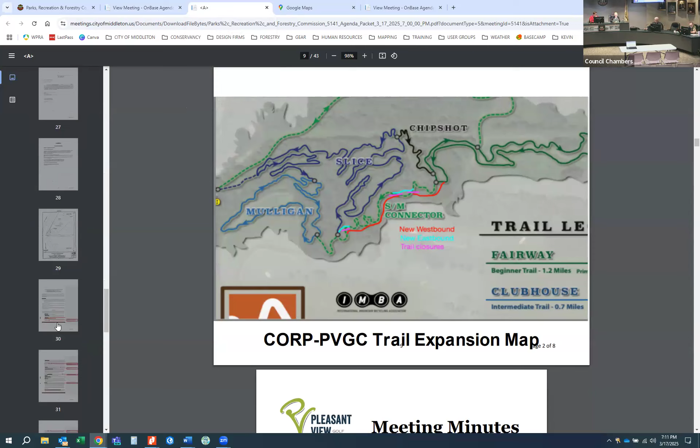I certainly didn't envision that we would be mowing the whole area. We wouldn't have to, even if it grows up. I would think the snow removal would be the bigger deal.

Removing litter from the paved area and nearby adjacent grassed areas, mowing grass areas, keeping any landscaping healthy and in neat condition. It's highlighted there under number 5.

I can't imagine that they would require us to mow anything other than adjacent to the path. That, from a safety standpoint, should be mowed by the DOT or by the county, whoever does it. I don't know what it would take for us to mow a mower's width on either side of the path, and I guess that might make sense.

But much more than that seems like something we don't really want to get involved in. I agree. The comment here includes a width, defining what we would need to mow in that area.

Any other questions or concerns? I just want to represent Kylie's concern. She has impressed this upon me ever since she arrived that, with this project, we are adding mileage to the trail system without adding staff.

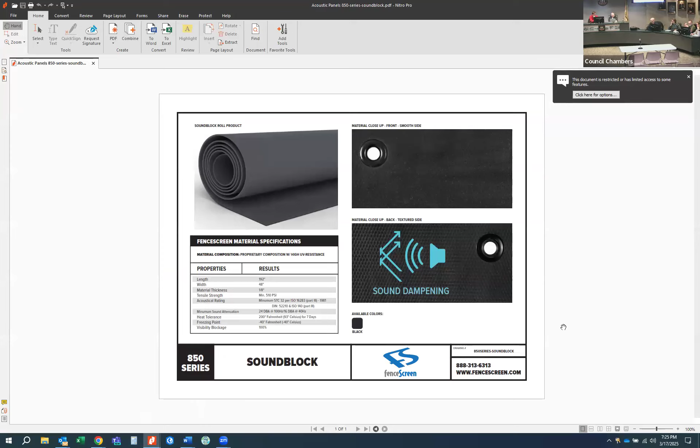This is a different application. Is that a concern here? Do you need to overlap this, and is that provided for?

Let me just, I have the website open here. Yeah, I went to the website.

Yes, so that it is tied together as they roll those panels out, it'll be zip tied to the fence. And then it will have overlapping so that there will not be gaps. Okay.

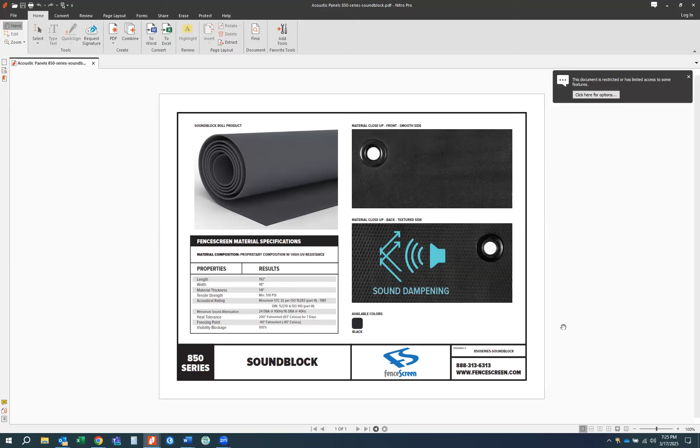And this has been used before and it's been proven to be effective? Correct. This whole pickleball noise thing is newer, as pickleball continues to rise. But obviously we have now installed any of these panels ourselves on projects that we've been involved with. We haven't been involved in any projects that have had them, but most recently over the last few years, there's just about every project that gets brought up.

So we had talked to Kylie about it. We know that pickleball noise is a real thing. It is loud, and this will provide some assistance in helping mitigate that noise. There's still going to be noise, but we're doing what we can to help mitigate it. No, you can't shut it down completely, but you have that many more players than you'd have with tennis, so I understand.

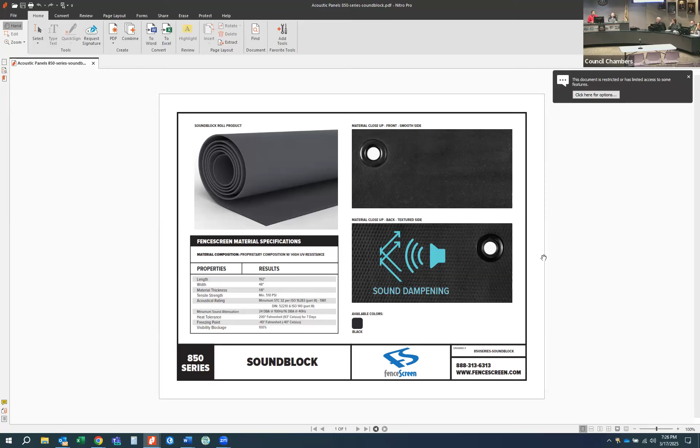Can you remind me the configuration along Mendota? Are those tennis courts or pickleball courts? Tennis courts. Okay, because that's what's going to be closest to the neighborhood.

Yeah, I love tennis, I love pickleball. I think the privacy slats seem like a good idea to me, because every time I go to a tennis court or pickleball court, the tarps are just flying in the wind and aren't really secured. So I would request that we table the sound dampening material, or earmark it for potential future use, but maybe not start with it. I think we also have to find out what the city's sound ordinances are for annoyances and things like that.

Are we doing this because we know it's going to be a problem, but we're spending $11,000 that maybe we need, or maybe we don't need at the current time, especially since we had to approve an increase. So I would just request that. Those are my thoughts, and I don't know what the city's noise ordinances are.

Can I ask the consultant, is that sound dampening material easy to add as an afterthought? Yes, this is something that could be added after the fact.

Actually, if I share my screen here, I have the layout up. Let me see if I can share what I'm looking at, with that layout of the 2 tennis courts adjacent to Mendota and then the 6 pickleball courts north of that. Can you see my screen yet?

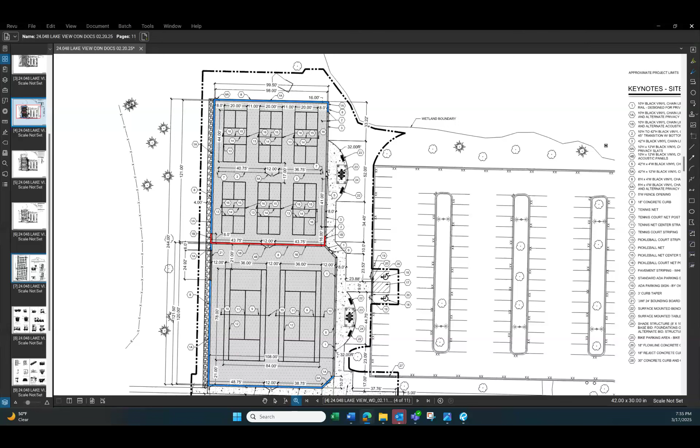That work for you, Ryan? All right, I'm trying again. Is it back up yet? We can see your screen, Ryan.

So yes, the tennis backboard, obviously, if there's a desire for a backboard, whether that's for community practice, anyone can utilize that at any time. That is on the west fence line here. That is something that is used for practice. And yes, obviously, if there's someone utilizing that court, that backboard is not available for use. And that's something that will always conflict.

So as we do a lot of high school projects, a lot of school projects that we're doing now do not include backboards. It's kind of a personal preference. Some community parks like this see more of a need for it just for general purpose use. It's really a mixed bag, some people really like them, some people say they don't get used much. And as we went through it with Kylie, she thought that there's a strong desire for it. So that's why it is included in the project. But yes, you're right that it would conflict with court usage. And that's how they are incorporated into any facility.

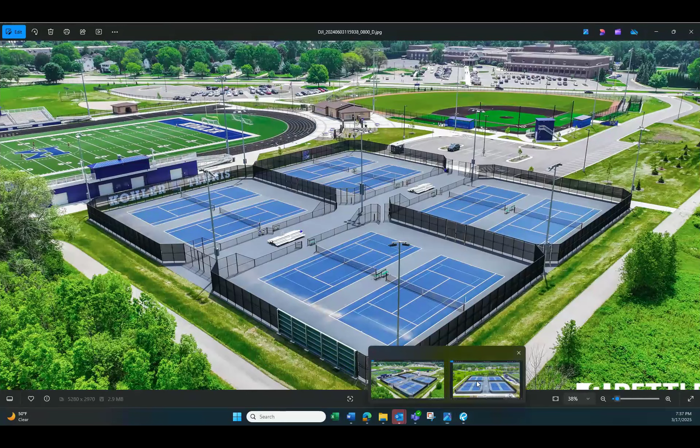You'll see the backboard in a couple pictures here. This is the backside of the backboard. And that park has now is basically just plywood, so it's not what this would be. So this would be truer, give more bounce, and for $28,000, it should do that.

Yes, this is a 40-foot long board. The one that we have in the project bid is 24 feet long, but it is a composite material for the surface itself. And then you can see from the pictures on the backside that it does have structural foundations underground with heavy beefy posts and these supports. So yes, it is a very structural system, definitely beefed up and longer lasting than a plywood board.

Which also means it couldn't be adjusted or added after the fact. Yeah, and that's the tough part, unlike just hanging acoustic panels or putting privacy slats into the chain link fence, it is installed in line with the fence. So there's a gap where the fence stops, and then that takes its place. The front surface of that backboard lines up with the fence fabric. But because of the foundations that would have to go on the ground and the posts instead of that fencing, it makes it very difficult to add it after the fact.

And I'm up and down Mendota Avenue more than I should be, in the car and on my bike, and I have never once seen somebody use ours. Never. I mean, given ours is not very amazing, the paint's chipping off, the wood is doing what wood does after many years. But I literally have never, and I have had the fortune of playing at many different tennis facilities around the country, and seldom have I ever seen that used. And I think with taking away from other future projects for something that may or may not get used, which is going to have a conflict for the tennis courts that we only have two of, I just am not in support of spending that money on something that may or may not get used, and it's going to interfere with one of the two courts we have to use. So that's how I feel about that.

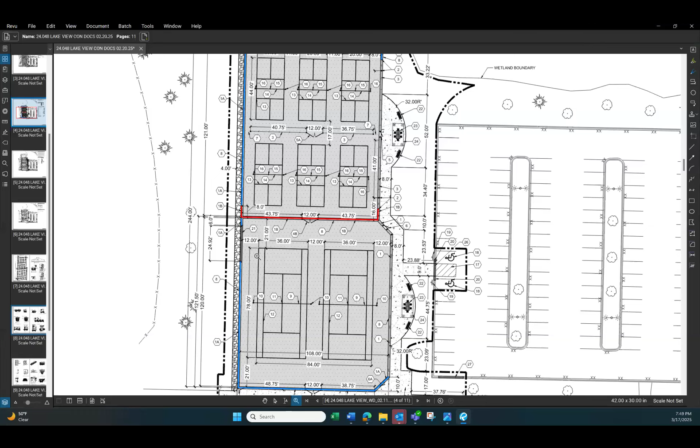How far out past the fence does the post-tension concrete extend? The post-tension concrete is up to it, but the foundations for that rebounding board system are like 10 inches wide. So those 4-inch diameter posts are within a foot of that concrete edge.

And you're saying that you think that if the foundation, the gravel base around the tennis court, were to be disturbed, that might be problematic? Yeah, and you'd have to drill these foundations, and I want to say those are 18-inch diameter concrete foundations, 4 feet deep.

Yeah, we're paying all this extra money for this fancy tension concrete. I don't want to screw with it.

I get that. I'm just thinking that if you're away from the concrete, you're away from the concrete, and if you need to offset the rebounding board by a few inches by putting some extra material between the rebounding board and the post, that certainly would be possible. I don't know. And I also don't know that the rebounding board, well, there'd be different ways of tackling this if you needed to set it back by another foot. But I don't think it would interfere with the post-tension concrete.

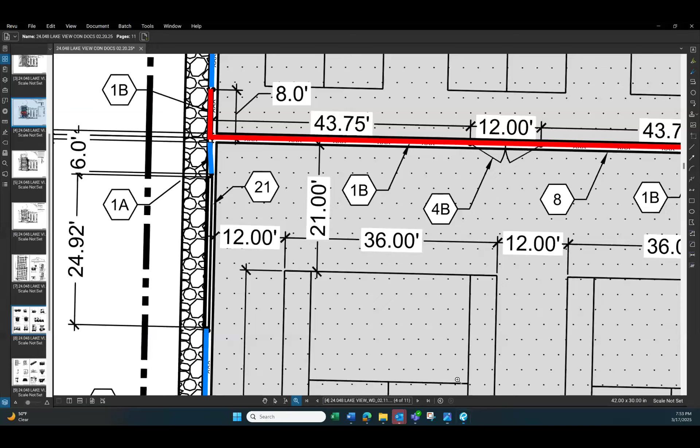We did have an alternate for installation just to get a number, but this was not originally in the original budget that was set up. Even these foundations were not in the original budget as we were talking about the scoping of the project. But we were able to get in the base bid the numbers in front of you, foundations for a shade structure at tennis and a shade structure at pickleball. That'll include the underground foundations, and then at whatever time is available, those structures can be ordered by the city and then installed.

Any other questions on the motion?

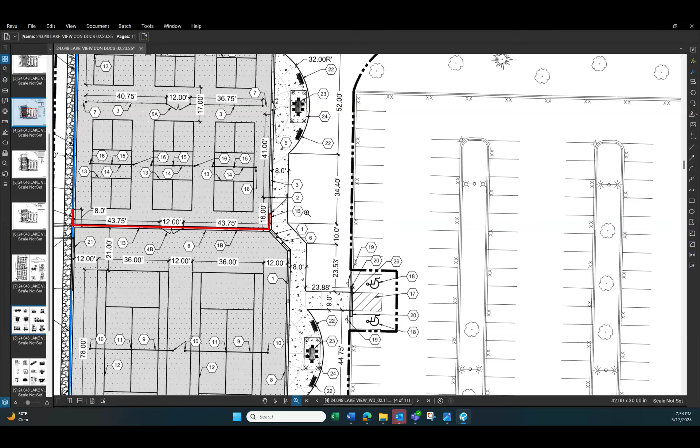It might just be the way it's worded, but I wonder if the best way to do this would be to accept, to make a recommendation to accept the base bid as it is, and then direct staff to create a change order to remove the baseboard or bounding board, fill in with fence, something to that effect. Sure, that would be the method that we'd go about it. We'd need to accept the bid as is and then create a change order.

Because it's in the base package, it's not an add-on. So accept the bid as is, make a change order, removing the board and adding the privacy slats.

I'm fine with that. You're good with that. Okay, do you have a motion and a second? Any further discussion on the motion? All right, just to be clear, we're voting on what we just described. Yes. Hearing none, all those in favor, say aye. Aye. Opposed? Okay, motion carries.

Was it unanimous? No. Okay, thank you.

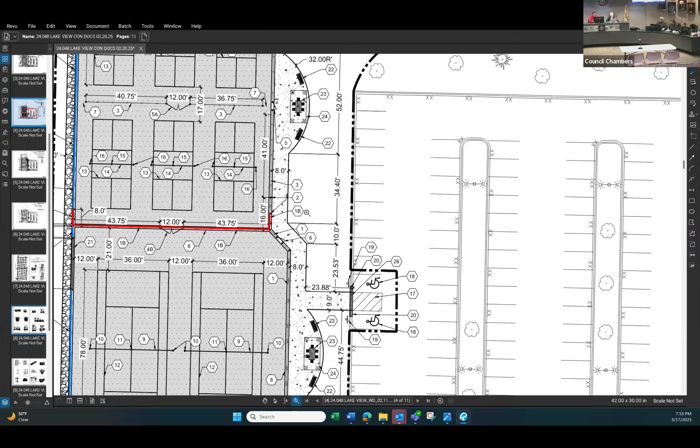All right, that concludes the agenda items. Now to liaison reports. So last week at the planning commission, we had an item that will be of future concern or future interest to the PRFC.

Dane County this year is piloting a program to create a place for home compost or food scraps. For this year, for one year, it's going to be at Terrace Avenue next to the skate park. It's going to go into three parking stalls, and the county is responsible for implementation of it, and they'll have a communication plan to get residents access to the facility.

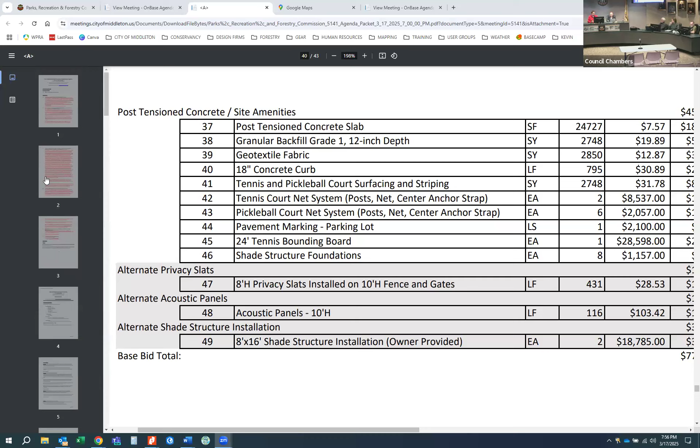After one year, they'll evaluate the program, see how successful it was, and if they do choose to continue it, they would actually like to switch it to Lakeview Park. Kylie was not in favor of it at Lakeview Park this year, mainly because of some of the construction work being done, and also potential future changes to that entrance area, which is still yet to be determined.

So we approved it. It will be constructed at some point this spring. And then, like I said, the residents will get information from the county on how to access it to drop off your food scraps. So I think that was pretty much the only item of interest at our last meeting.